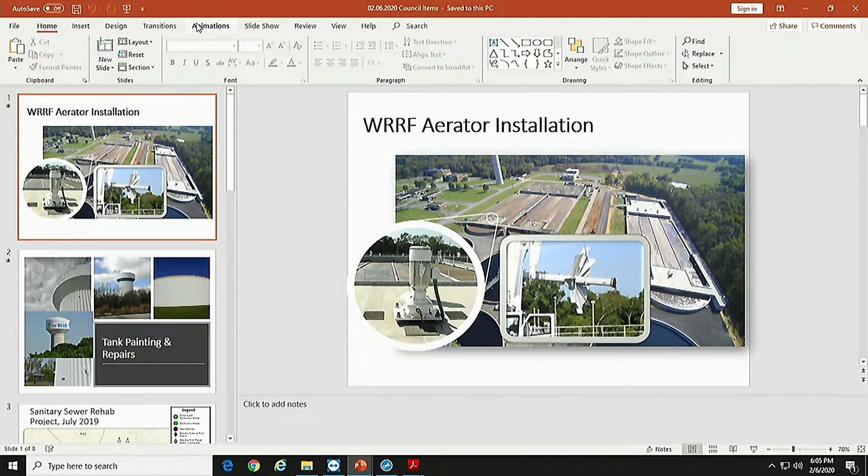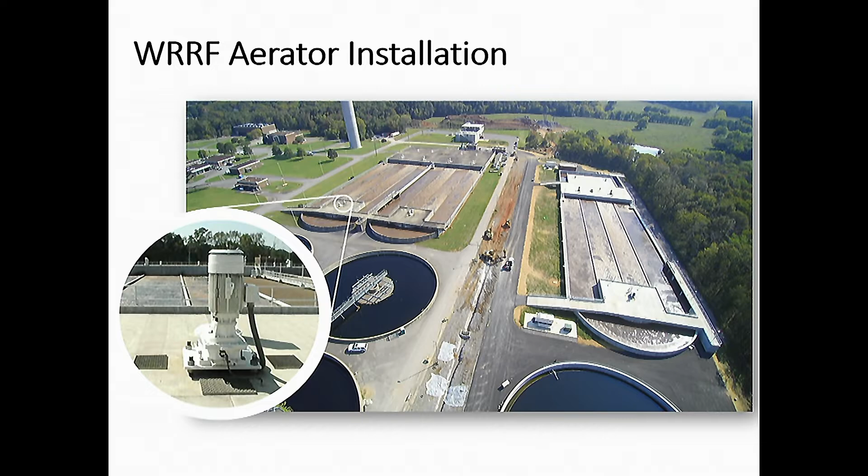All right, we'll move into new business. We have water recovery facility aerators installation, water resources. Mr. Gore: Mayor McFarland, City Council, thank you for the opportunity to come before you tonight. Depending on how much time you all want to spend talking about water resource recovery facility improvements and water plant improvements, I've got some pictures here to make this a little more interesting. What you see on the screen, we have I believe 9 aerators at the Water Resource Recovery Facility. These are actually large impellers.

These impellers entrain air into our microbiological treatment oxidation ditches. We budgeted for 3 of those. We've actually purchased the materials, and using our water, wastewater, mechanical, electrical services contract with John Bouchard and Sons, we are now asking for them to help us install those 3 aerators at the WRF. Their cost to install those is basically $23,349 each, so the total install would be about $70,047. We do have standing hourly unit prices and equipment unit prices that we establish these work orders with them. I'm available for any questions on that item if you have them.

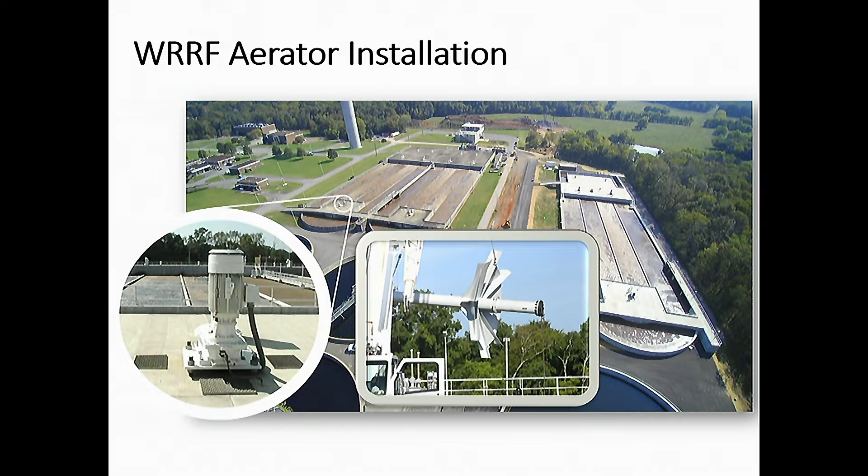Any questions for Mr. Gore? Move for approval. Second. Motion is seconded. Ms. Wright, please call the roll. Vice Mayor Scales Harris, aye. Mr. LaLance, aye. Mr. Martin, aye. Mr. Shacklett, aye. Mr. Smotherman, aye. Mr. Wade, aye. Mayor McFarland, aye. We'll now move into Murfreesboro Water Resources water tank painting and repairs.

There's a couple of pictures here of the Mill Street tank and the Halls Hill tank. I don't have the Tiger Hill tank pictured here, but we effectively have 3. The Tiger Hill tank and the Halls Hill tank are ground storage reservoirs, that's the upper right picture. It's really just a large concrete reservoir on a hill, so it doesn't need to be elevated. The Mill Street tank you see across the street from City Hall has the logo Murfreesboro, home of MTSU. One of those pictures in the top center was from 2005.

I had forgotten this, but it had a blue apron on the tower section, and blue was on top. We repainted that tank back in '05, and it is now entirely white. That tank does have some traces of lead in it, so it will have to be sandblasted down to bare metal. That's part of the reason this overall project is about 2.6 million. It has been budgeted; we have it in our working capital reserve, so it will be paid for through cash on hand.

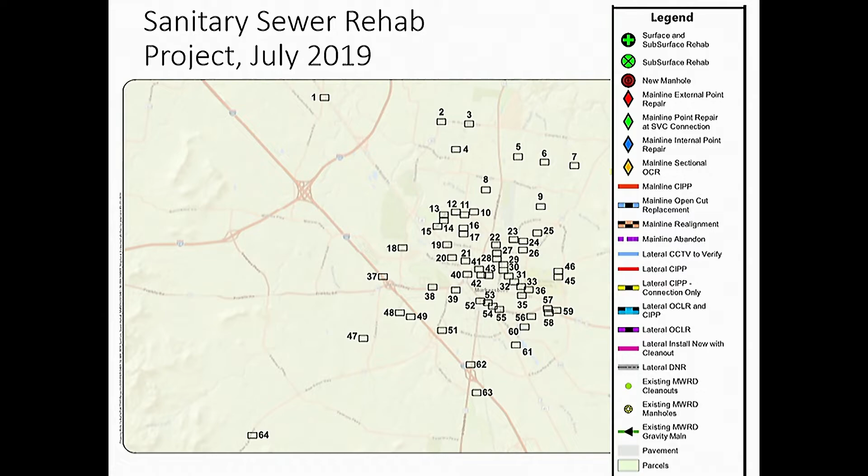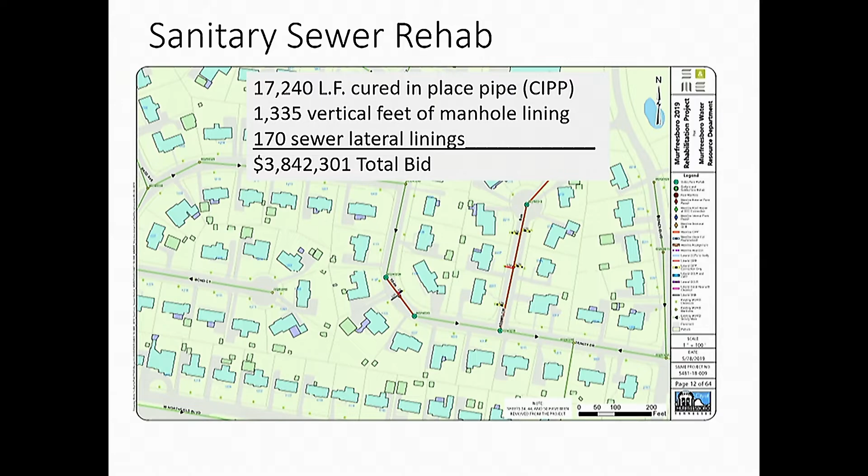So as a reminder, we awarded this project in July of 2019. It was a $3.8 million project with just over 17,000 feet of cured-in-place pipe, 1,335 vertical feet of manhole lining, and 170 sewer lateral linings. The change order we're asking for today is an additional $150,000, bringing total construction expenditures up to about $3.99 million, just under $4 million.

We had $4.5 million budgeted. When you take away engineering expense, we still have about $75,000 remaining in our budget. The additional work does involve some sewer main replacement at West Clark and Northwest Broad, and some exploratory digging and paving repairs involved with sewer lateral work that was unexpected. So we would ask for council approval of the change order in an amount of $150,812, and I'm available for questions.

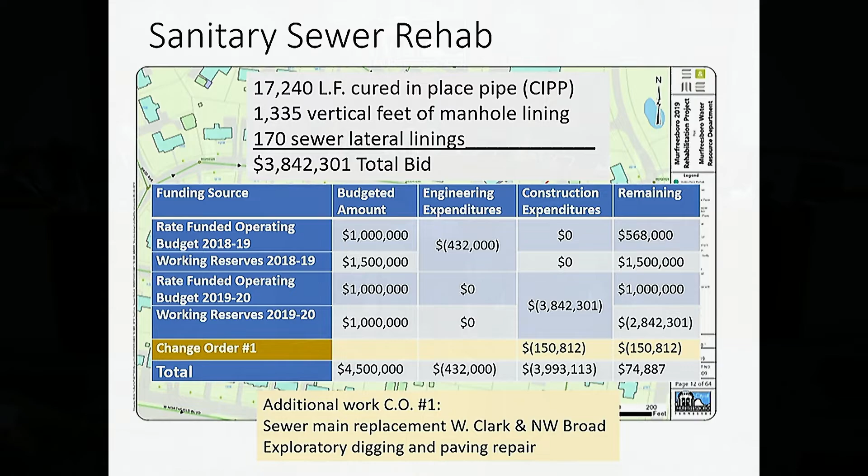So moved. Second. Motion is seconded. Vice Mayor Scales Harris, aye. Mr. LaLance, aye. Mr. Martin, aye. Mr. Shacklett, aye. Mr. Smotherman, aye. Mr. Wade, aye. Mayor McFarland, aye.

Yes, ma'am, speaking of water. Yes, ma'am, how are we doing with the flooding last night and the situation? Are we looking good in Murfreesboro?

There was a lot of email correspondence going back and forth, and we had some high water signage and road closures. Raymond Hillis in the Streets Department was primarily involved with ensuring public welfare on those streets. I put a little memo out on the sewer side of things that said we did have some challenges. We were at 64 million gallons a day at our plant, which is rated for 24, so we were really pumping some water through there.

But the great news is that everybody still has safe drinking water. No one, as far as I know, was hurt. The public welfare was safeguarded, and everyone was able to take a shower and use their facilities this morning. So I'm going to say that we weathered the storm very successfully.

Will you pass along to your staff, the men and the women, that the council wants to thank them for a job well done? Thank you very much. I know a lot of folks don't see it, but folks are getting up real early, and they're out on call in the middle of the night in very wet and dangerous conditions. My prayer is that everybody's just safe, as the city workers are out there trying to make sure what roads are passable, and again, sometimes when you try to safeguard the public, I don't want them putting themselves at risk.

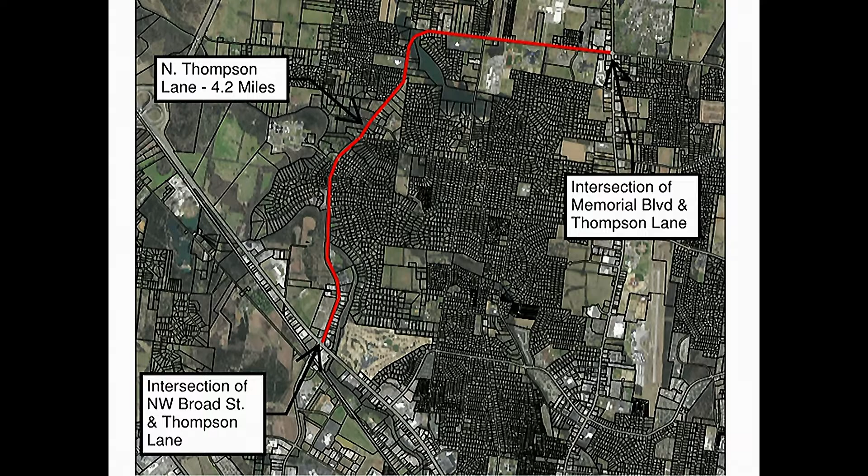Move for approval. Second. Motion is second. Ms. Wright, please call the roll. Vice Mayor Scales Harris. Aye. Mr. LaLance. Mr. Martin. Aye. Mr. Shacklett. Mr. Smotherman. Aye. Mr. Wade. Aye. Mayor McFarland. Aye.

Mayor, talking about Thompson Lane, and I talked to Darren prior to the meeting about this. I spoke with Representative Sparks before the meeting tonight about Thompson Lane and funding for the project itself. And of course, TDOT has a limited amount of funds, I know, but I still think that the sooner we can get Thompson Lane redone, the better off we'll all be, and at least widened. And so hopefully we can expedite that.

He said one way that we might expedite it would be if we were to send a letter signed by all the council members to the local delegation so that they would all be reminded of the importance of us getting Thompson Lane's bottleneck removed, and perhaps get it expedited with TDOT even. So if we can do that, that would be great.

So just something to think about, and if you guys want to participate, we may be able to go ahead and get Thompson Lane moving quicker than what their current schedule says, because I know some of them have good relationships with the governor, and perhaps there's potential of getting a little pressure on the governor to understand, with our growing community, the importance of making sure our infrastructure continues to work properly and efficiently as we possibly can with the traffic concerns we have.

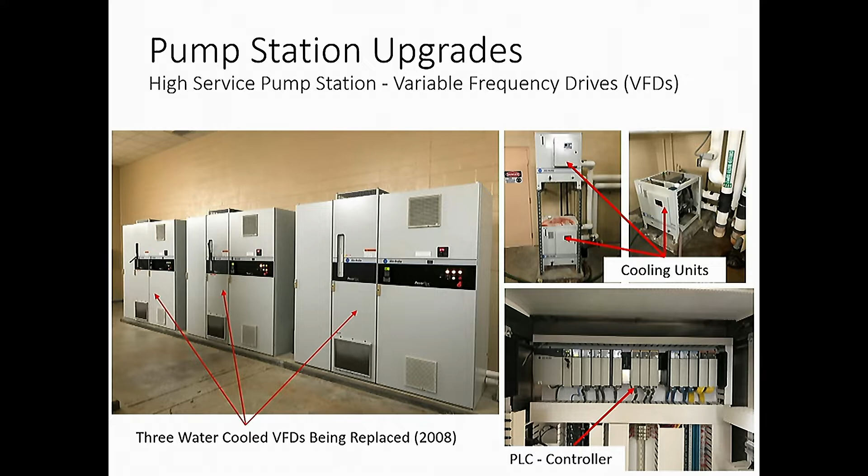asking for an engineering task order in the amount of $140,130 with Smith, Seckman, and Reed. What this task order entails: we have some capital improvements or expenditures at our water plant where some variable frequency drives have reached the end of their useful life. We actually had one need an emergency repair because the cooling piping in it burst unexpectedly, so we only have 2 operating right now. So this engineering task order would entail designing for new variable frequency drives which operate our high service pumps.

We have 3 high service pumps now. We would also include in this task order the design for putting in a 4th pump. We have that, you can see on the right side of your screen. We have the blind flanges in place for the piping to install that 4th pump, so it would really just be the cost of the pump.

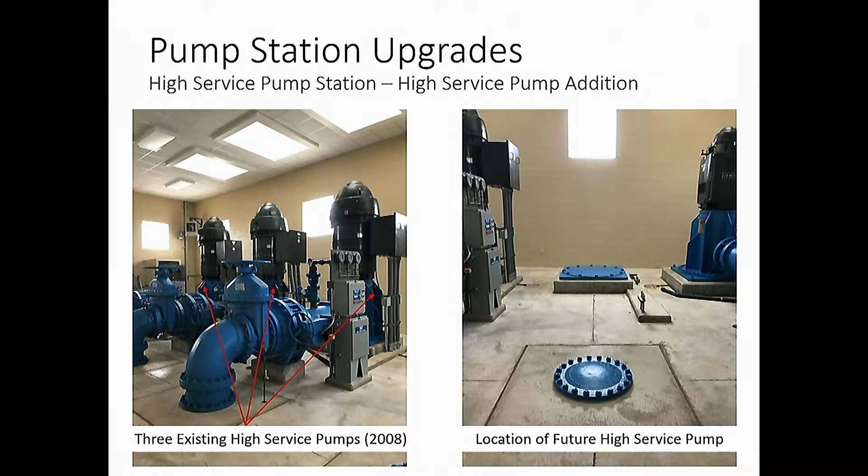There are also 4 variable frequency drives that operate our membrane pumps. The membrane pumps take the settled water out of the settling basin and pressurize it through our, for lack of a better term, spaghetti strand membranes. If you've been out to the plant and seen those membranes, it takes a lot of pressure to get the water through there, but they're great filters - they take out all the Giardia lamblia and the Cryptosporidium and a lot of potential viruses as well. So the total cost for all those improvements is about $2.56 million.

So whenever I bring you a task order for engineering, I also like to bring an estimate of what that ultimate total cost looks like. But for now, we're just asking for the expenditure of the engineering task order with Smith, Seckman, and Reed in the amount of $140,130. I'm available for questions.

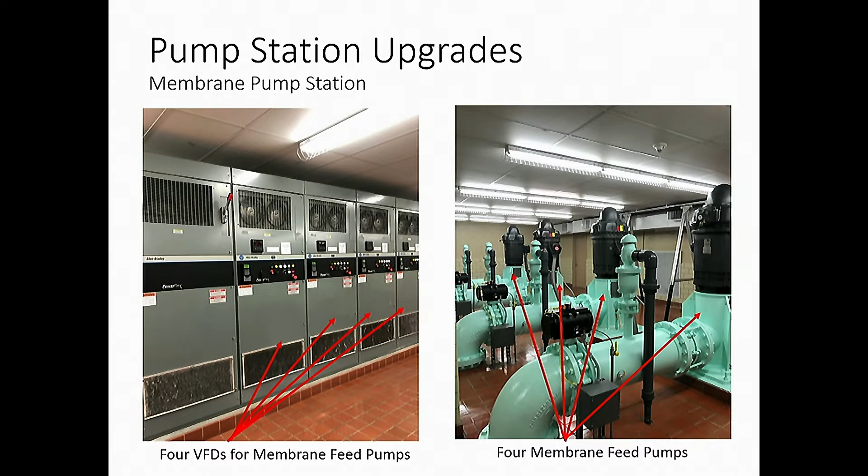Any questions for Mr. Gore? No comments, I move for approval. Second. Motion is seconded. Ms. Wright, please call the roll. Vice Mayor Scales Harris, aye. Mr. LaLance, aye. Mr. Martin, aye. Mr. Shacklett, aye. Mr. Smotherman, aye. Mr. Wade, aye. Mayor McFarland, aye.

All right, thank you, Mr. Gore. We're going to move, before we have our public hearings, to licensing. We have one beer permit tonight before you, Mayor.

This is for a change in ownership at a market at 1660 Middle Tennessee Boulevard. The application is in order for their background check. They do need to finish up their building code inspections before we could issue that permit, and that would happen after we get that back, if you approve it tonight. I believe there is also an application coming for them to include wine in this market - it is currently there under the other owners, but that part is not ready yet. I'll be glad to answer any questions.

So moved. Second. Motion and a second. Ms. Wright, please call the roll. Vice Mayor Scales Harris, aye. Mr. LaLance, aye. Mr. Martin, aye. Mr. Shacklett, aye. Mr. Smotherman, aye. Mr. Wade, aye. Mayor McFarland, aye. I don't see any board and commission appointments.

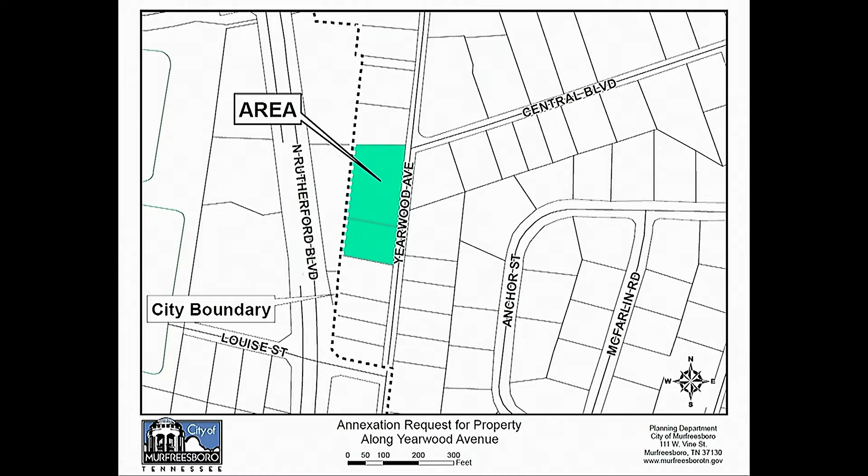We'll go into more detail about the proposed development during the zoning public hearing. Now we need to conduct a public hearing regarding the annexation petition and the plan of services only. The zoning will be the subject of the public hearing that occurs after that. Planning Commission conducted a public hearing on this matter on December the 4th and voted to recommend its approval to the City Council. I'll be happy to answer any questions before or after the public hearing.

Any questions on the plan of services and the annexation? All right, seeing none, we'll need to hold a public hearing. Anyone wishing to speak, if you'll come to the podium, if you're representing a group, or if you're coming to speak, you'll have 5 minutes. Anyone wishing to speak, if you'll ask your questions to the council, we'll get those answered at the end of the public hearing. Anyone wishing to speak for this plan of services and annexation, please come to the podium.

Good evening. My name is Richard Graham. I live at 2403 Central Boulevard, exactly the northeast corner of Central and Yearwood Avenue. I can see all the way down the north boundary line of that property.

I think, if I'm not mistaken, y'all approved a fence of some sort down Yearwood Avenue, a solid fence. I would like for you to consider putting a fence on the north side and a fence on the south side. Now, I think originally y'all decided to put trees, greenery, or whatever. I don't think that's a good enough containment for the neighborhood.

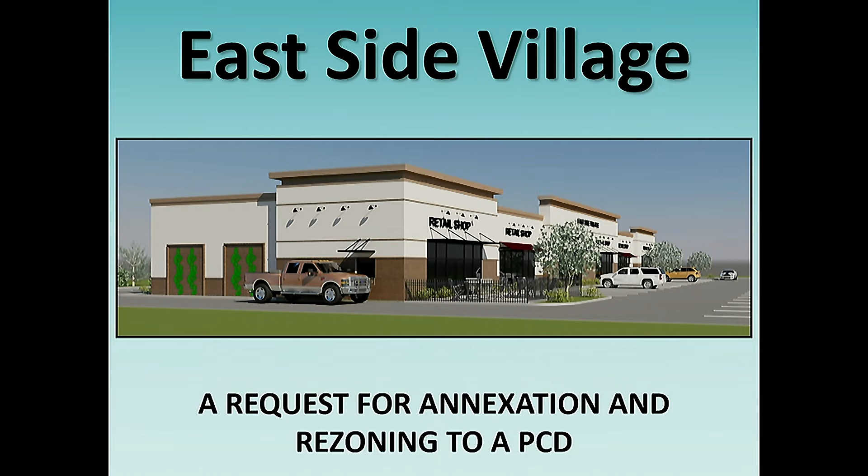You can see the site is located just on the east side of North Rutherford Boulevard, just southeast of the MTSU campus. Zoom in closer and you can see the site itself. As Matthew talked about, there's a retail center and a gas station across the street on the other side of North Rutherford Boulevard. Yearwood Avenue is the yellow line running along our eastern boundary, where the residential units are on the other side, and to the south and north as well.

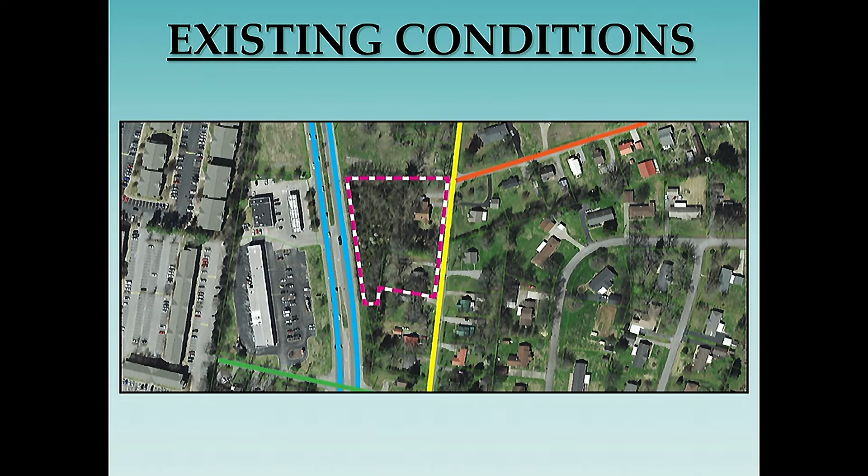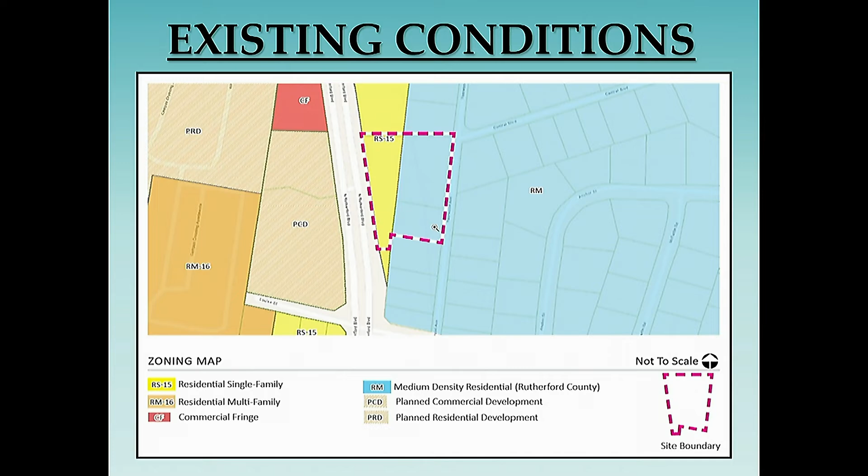As Matthew talked about, we have dual zoning on this property, so we're looking at combining that down to make the PCD. We're taking the residential, both in the city and county, and pulling that into our planned commercial development.

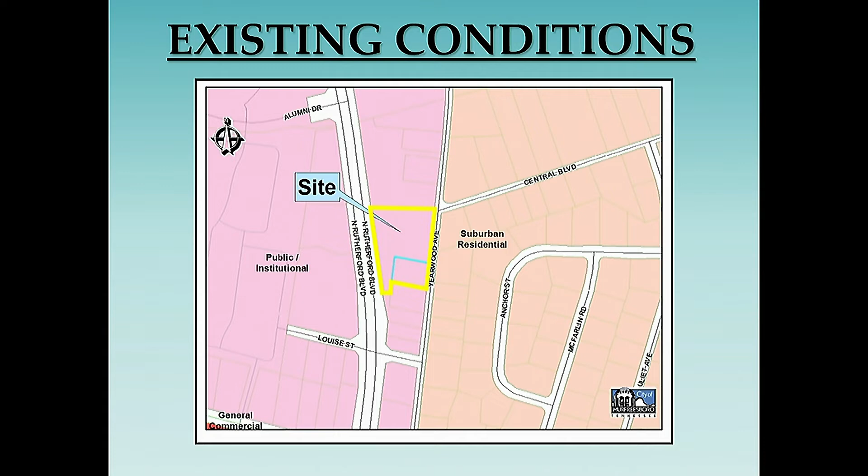Regarding land use, this property is currently set up as public and institutional, mainly based on its proximity to the MTSU campus. Properties across the street, which are retail in nature, are the same as what we're proposing tonight. They're actually included in that public institutional use, so we feel it's a comparable use. We see this development as an enhancement that can help campus by providing services for students, teachers, faculty and staff in their daily needs, through the services we'd potentially have for clients inside the building.

Looking at the plan itself, we're proposing a 1-story single building about 11,100 square feet. This will be a multi-tenant retail strip center. On the northern side of the building we're providing drive-through access, so we're looking potentially at a restaurant, a dry cleaner, or some kind of bank tenant on that northern side. The rest of the building would be leased to other tenants.

Matthew talked about our work with the Water and Sewer Department. We were advised this is a low sewer capacity area, so we're looking at low flow users as our tenants in this space. We'll definitely be working with the Water and Sewer Department to make certain any tenant use is appropriate for our sewer flow from the property. On the back side, we have 10 queuing spaces for our potential drive-through.

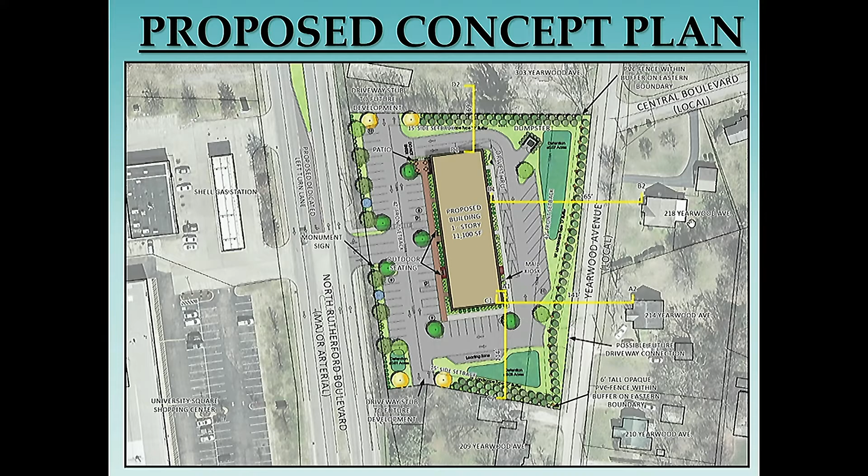Kind of give a little perspective - you can see that fence in these cross sections we provided this time, showing you the building itself is on the left-hand side, coming in the lower right corner of the building. This gives you a perspective about how the separation is between the building and the uses, but also shows where we're proposing that 6 foot tall fence and those evergreen trees on the outside along the Yearwood Avenue side.

Just a couple different views - this is another view along Yearwood showing the greater separation, because this building and property does tilt further away from Yearwood based on aligning this building with North Rutherford. So you get a little greater separation as you move more towards the north end. This gives you a better feeling, but again shows that 6 foot tall fence and buffer along Yearwood. And this gives perspective looking off at the southern end of the property in regards to separation.

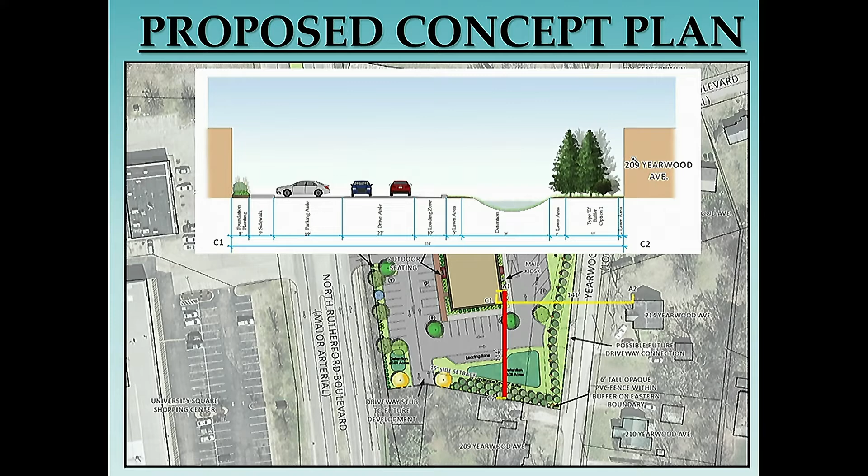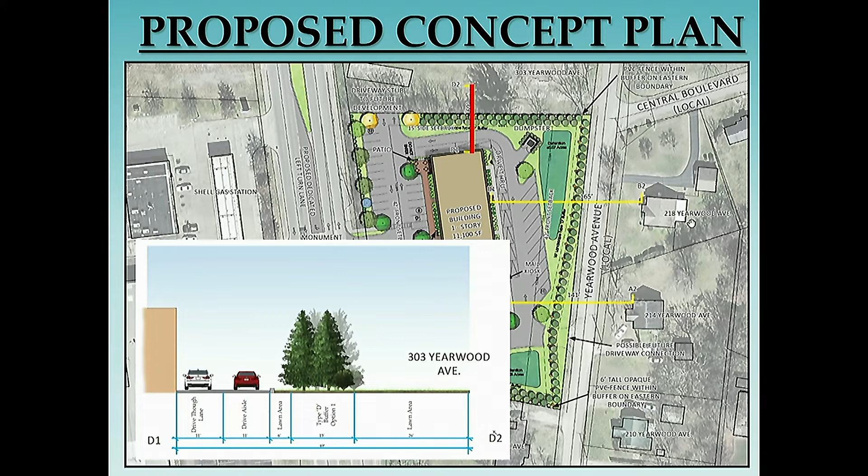This is where you see the double row of evergreen trees, which is in the beginning process. You also have a 4 foot tall evergreen shrub laced in between the gap in the staggering, to fill in the gap in the short term as those trees mature. So that's the view on the south side. This shows you what the view looks like on the north side. The Yearwood Avenue property to the north has no structure on it at this time - it's a vacant property, so no structure is shown on this diagram, but it shows we are providing that type D double staggered row of trees on that side as well.

Architecturally, we'll be looking at a couple different brick components. This will be an all masonry structure with a darker type of brick on the lower portion and a lighter tan brick on the top. We're looking at doing some accent elements along the cornice side of things, really playing into some good architectural character of the building on that side.

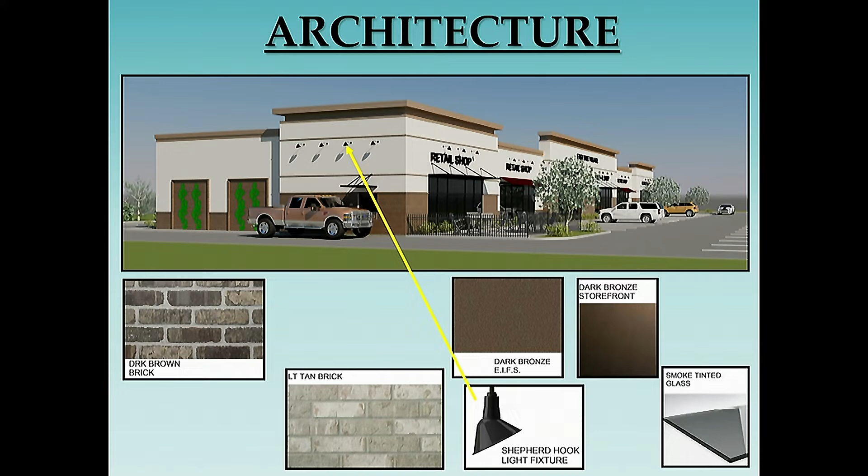And then keeping along with that darker tint, we'll be doing some darker bronze metallic pieces along the windows, some smoked glass, and also incorporating some shepherd hook lighting fixtures along the building to add a little extra lighting, but also add some more architectural character to the building itself.

This is just all four elevations. The west elevation on the top of this drawing is the one that actually faces Rutherford Boulevard, so this is what they will see from Rutherford. The middle drawing there is the back of this, facing Yearwood Avenue. Aside from the fact that we'll have a fence and evergreen trees growing up over time, this is what you would see if you were looking at the back of the building on that side.

HVAC units and such will be on the roof, and it'll be hidden behind the parapet wall that you see there in regards to the cornice elements on the back side of the building as well, not just on the front. We'll be putting these on the back, and then the side angles on those.

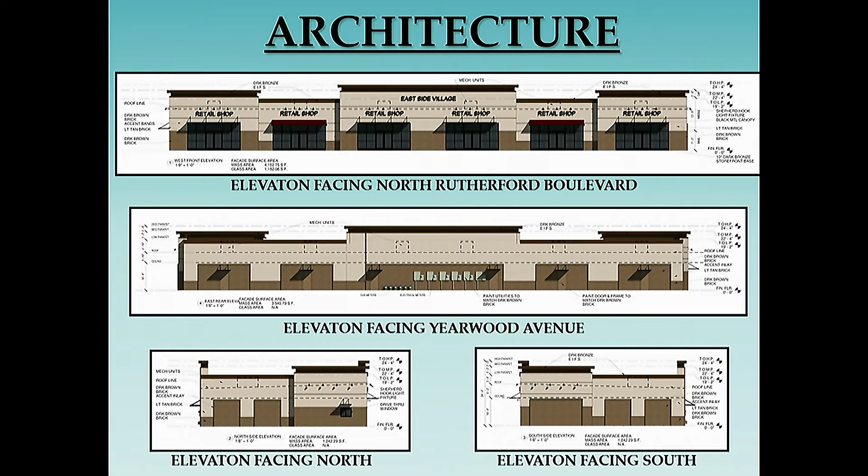Access, like I talked about, we do have one main access point. We're proposing an access point at the already existing 3-way intersection on North Rutherford. Right now it is a 3-way; we're proposing to make this the 4th leg. We'll have a dedicated lane in, and two dedicated lanes out—one to turn right on Rutherford to head north, and one dedicated lane to turn left. So it'll be a 3-lane access point at this point in time.

We'll also be cutting the median itself to install a dedicated left-hand turn lane, so that as you're coming south on North Rutherford, there's a dedicated left-hand turn lane to cross the traffic heading north to get into the site. So we're pretty much providing a very well-functioning 4-way intersection.

And again, as I talked about earlier, there is that opportunity in the future that there could be a connection based on whatever jurisdiction, so we have that stubbed out for that opportunity.

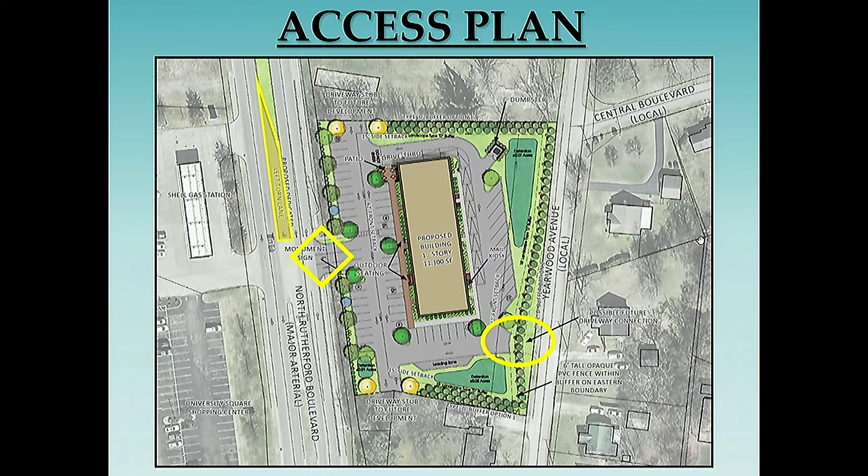A couple of the pieces, parts—we are looking at providing a couple little amenity areas. We're looking out in front of the drive-through portion with the potential for an outdoor dining area, say if that was a restaurant on that north side, being a dining area. If not, that would just be more of a space for outdoor gathering on that side. And again, looking at a couple other places with outdoor seating areas along the building itself, with a decorative type of pavement along the front of the building, whether that be brick or stamped concrete or some other material to add a little extra character to the building on that side.

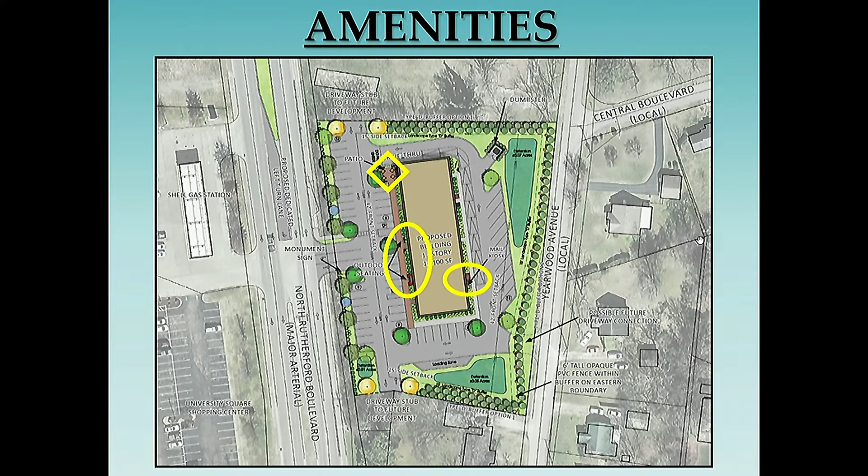So on the back side, we'll of course have a wonderful mail kiosk back there as well. I appreciate your time and consideration of this project, and I'm here for any questions now or at the public hearing.

Mr. Graham had a question about the fence—whether it's placed on the eastern side. Yearwood is the eastern property line, and we provided a fence along the east side. He was asking about a fence on the northern side, where we're providing the full type D landscape buffer along the north side, which includes a double staggered row with evergreen shrubs as well.

Rob, I brought this up during the planning commission meeting, but I know the planning commission doesn't love black chain link fence. I talked to you guys after the meeting, and y'all kind of agreed it would be okay to put that fence between this row of trees, which would not be visible, but it would give the security the neighborhood was asking for, on both the north side and the south side. It's a double row of trees, and if they put that black chain link fence between the rows, you don't see it, but it gives security from two directions.

With the drive-through across the back of the building, this keeps people from coming around toward Yearwood who might want to take advantage of somebody parked on the back side of the building. So it kind of secures the lot.

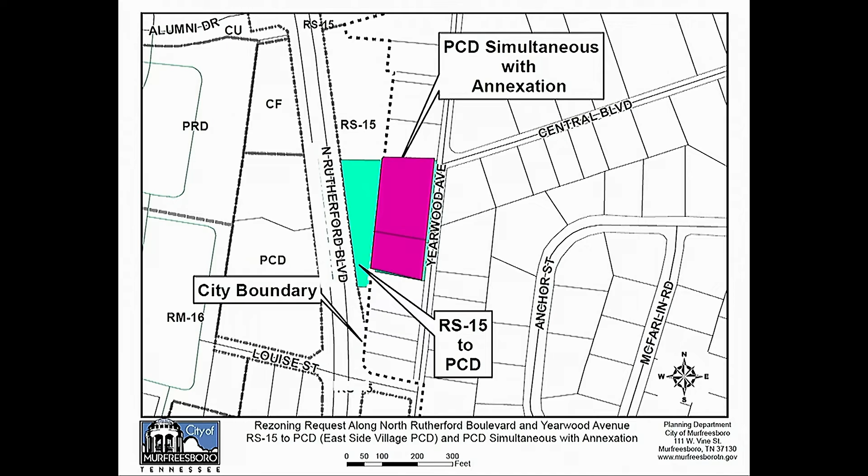But I think as long as this project is, we're dealing with the conditions as they're presented today, and that's why I would support what Rick's saying, and I think Rick is supporting what I'm saying, under the current conditions would be the best layout. With time, as the property develops, then it should be evaluated as to whether or not it should be removed.

But I don't want it to be a permanent fence. We don't want to create boxes going down the street with each development. But at the same time, that's not what we have right now. We have residential property on both sides of it, RS-15 to the north, and the property to the south is still residential property that we think is going to develop hopefully soon.

I'm concerned about the south when putting it there, because I don't think it's going to be there that long, but there's no guarantee what happens with the economy or whether the person who currently owns the property may decide to sell it and have somebody else develop it, and they may sit on it for 15 years. So understanding we're dealing with the current conditions as the property sits today, I think the best plan is chain link fence between the north and south boundaries and solid fence across the back to block lights from penetrating the vegetation to the neighborhood.

And for clarification, if you look at the concept plan, they have the buffer stopping here and here, right before you get to the stubs to the north and south property line. Is that the limits of where you would like the fence to go? That's where the fence stops as well.

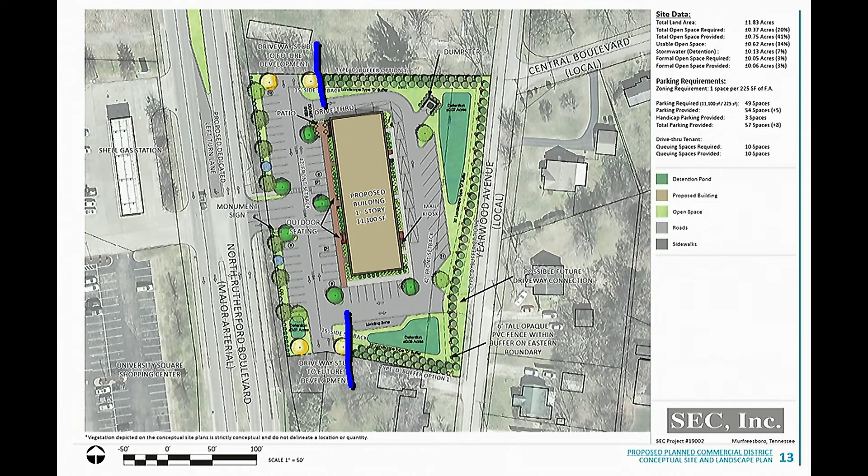So we have a motion on the floor to continue with the fence on the east side. We would have a chain link fence, black, hidden between the two buffers on the north and south side, but subject to removal if additional property comes into the planned development in the future. The fence would be 6 feet in height, and the buffer plantings would be subject to removal as well upon development. So I'll second what Rick's motion was and what Shane just translated, so we have a motion and a second.

Vice Mayor Scales Harris: Aye. Mr. LaLance: Aye. Mr. Martin: No. Mr. Shacklett: Aye. Mr. Smotherman: Aye. Mr. Wade: Aye. Mayor McFarland: Aye.

Folks, I hate to do this, but I have my kid's last basketball game of the year, so I'm going to sneak out and try not to get a speeding ticket for a game that started at 7:30. Good luck. So Vice Mayor Scales Harris is going to take over.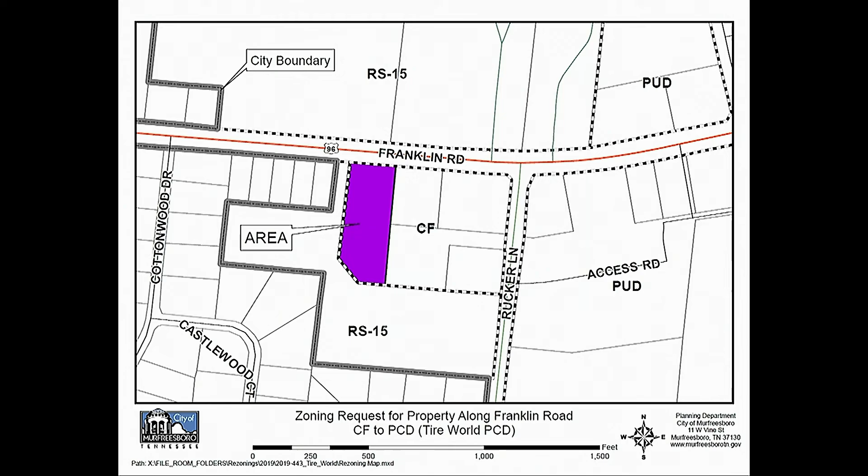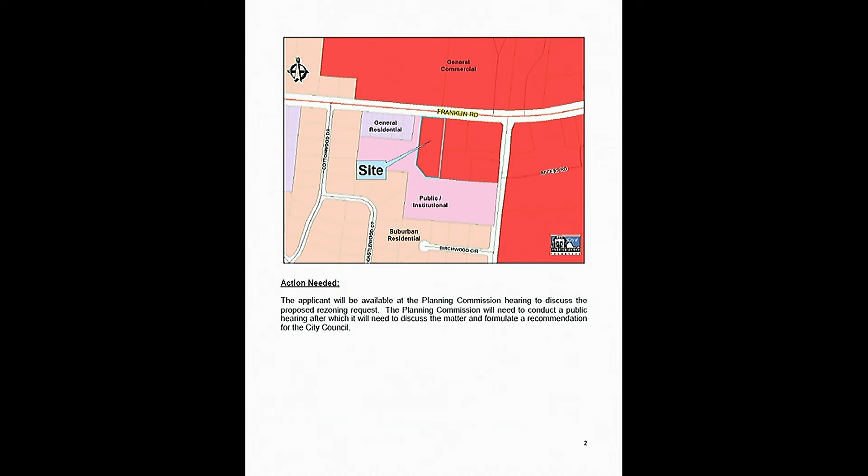The comprehensive plan calls for general commercial land use character for this property, and this particular use is consistent with that character, so this is consistent with the comprehensive plan. As I mentioned, the Planning Commission recommended approval of this request after holding a public hearing on December 4th. And unless you have any questions for me, I'll yield the floor to Mr. Taylor to make a brief presentation.

Hey, I just want to make a couple comments real quick. You come on up, but Matthew, I just want to tell you thank you for all the work you're putting in, man. This stuff is all hard these days, but I appreciate all the work you and your department are doing right now. The best way I know to explain it is that I'm going to abstain from the discussion on this, which will probably make your night. But I do need to abstain from this discussion, okay guys? I just wanted to get that out there. But Matthew, thanks so much, man. Thank you for your kind words.

Thank you, Vice Mayor Harris and members of the council. I'm Matt Taylor of SEC here in town. I am accompanied by Mr. Randy Lopez, who represents Tire World, the applicant on the project. And we do have a brief presentation on our proposed location of a new Tire World.

As Mr. Blomeley said, it's about 2.4 acres on the south side of Highway 96, just to the west of Rucker Lane. Some of the more recent development in the area was Toots West, as well as River Oaks Community Church, both on the same parent tract as this site. The current property is mostly cropland and pasture land, with no active livestock on site.

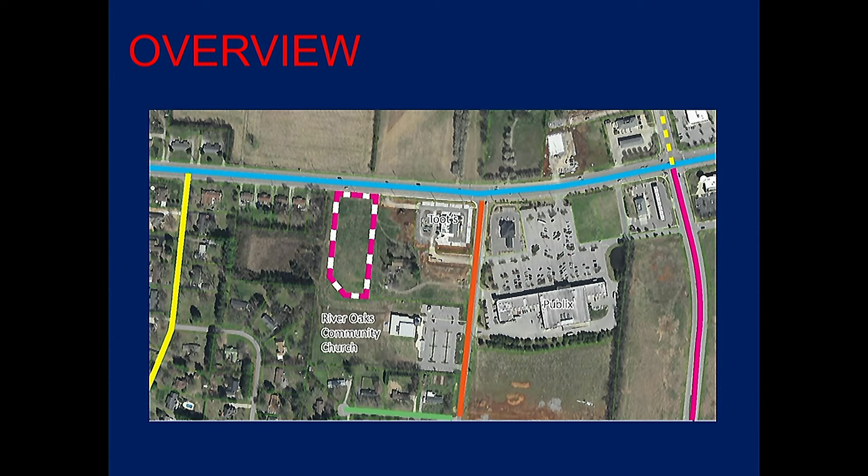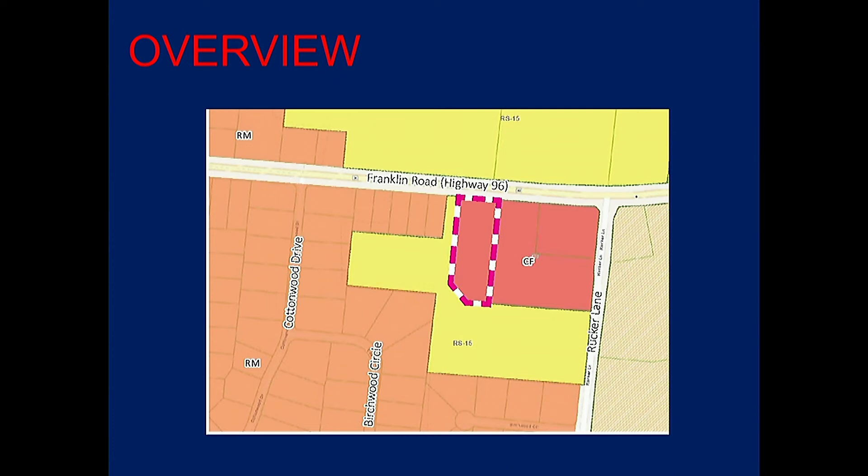As Mr. Blomeley said, the site is zoned commercial fringe. This particular use is not allowed in that zoning district, but we feel it is a very complementary use, not only to the residents in the surrounding area, but to the businesses and their patrons nearby. It is also compliant with the 2035 land use plan.

The campus layout breaks the buildings apart to create a more campus atmosphere and separate the uses. The northerly, larger building at the top is more retail oriented, where customers come in to get tires serviced or new tires. The southern building will be more back-of-house corporate headquarters. Tire World has several locations around Middle Tennessee, not just Murfreesboro, so we're consolidating that back-of-house use in this one location.

Those buildings total about 14,000 square feet in size, both 1 story. We've got over a third of the site dedicated to open space, so it'll still be a very green space even after it's developed. We've tried to provide good pedestrian linkage back out to Highway 96, screening the parking, and providing ample landscaping around the site.

We have one driveway connection, tying into an existing driveway onto Highway 96 that was constructed with the Toots project. We've also planned for 2 future connection points to commercial sites to the east and west of us, so when those develop, we'll be able to tie directly into them instead of having to get out on Highway 96 itself.

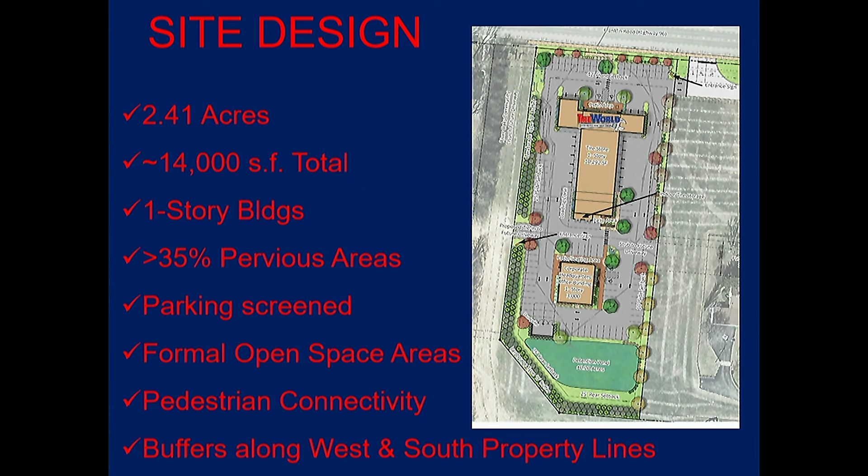For the architecture, we were very careful about maintaining a campus atmosphere while complying with the design guidelines. We've got defined entryways, multiple building planes, and we shortened the maximum building height down to 30 feet, even though CF allows up to 45. So we've been much more restrictive with this project than the CF district allows.

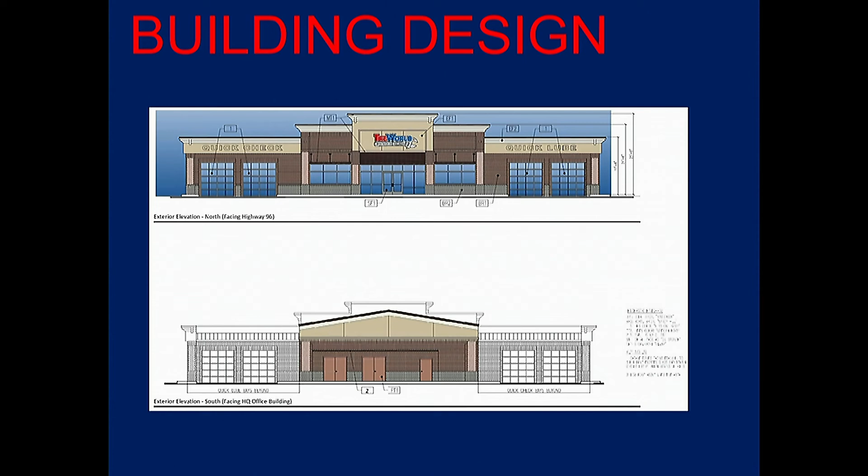The top picture here is what will face Highway 96, a very attractive front of the building. Those doors will be frosted glass on each side of the main entrance, so you can't see into those entryways. You'll notice intricacies in the brickwork, canopies, and we carry that brickwork and glass around the side. The rear office building will contain the same architecture and brick detailing, reinforcing that campus atmosphere.

This just outlays all the materials. They're all good quality materials that we've proposed for the building.

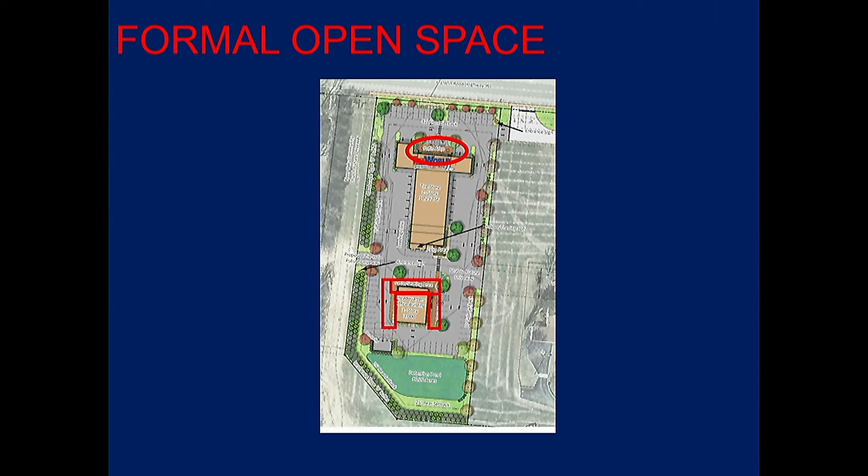We have planned 2 formal open spaces. The one on the northern side is geared more toward customers, while the southern side is for our employees. Some of these will have enhanced paved areas through pavers and colored concrete, and of course seating and shade structures.

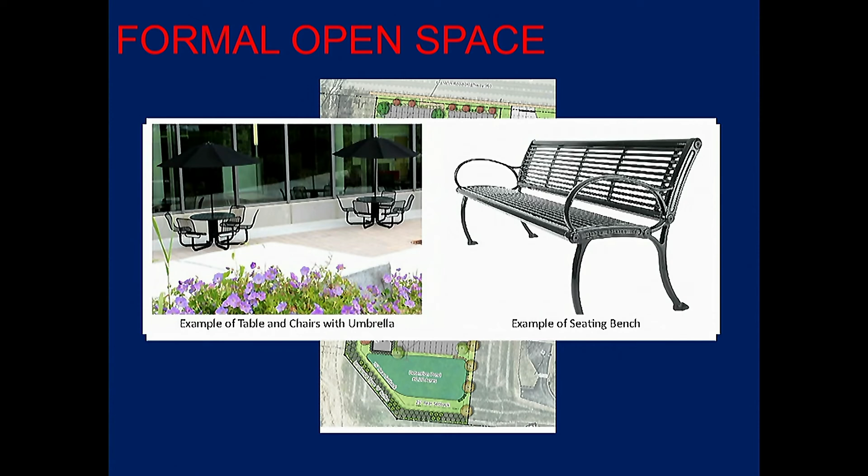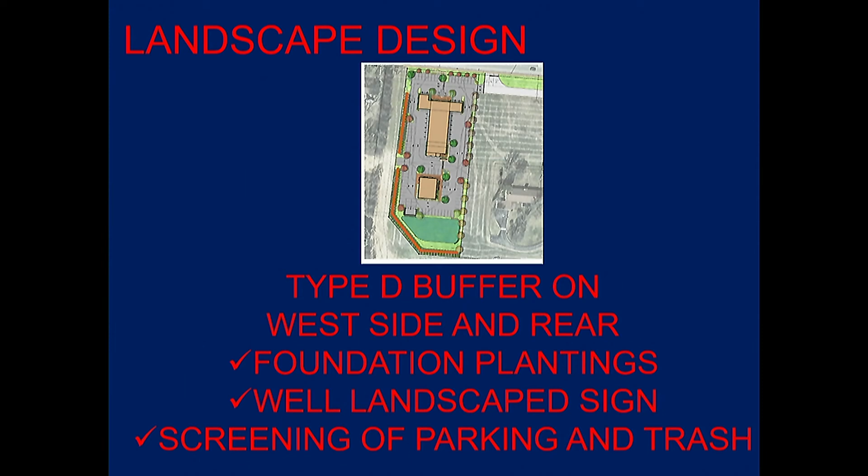For landscaping, we'll have a type D buffer along the west and south where we abut the church's property, and the rest of the property will have normal perimeter landscaping and base of building landscaping, except where the garage doors are to get into the building — some of those are screening efforts.

For the uses, we really narrowed these down so they're very low impact and complementary to the area. We know exactly what we want to do, so the uses we've outlined as allowed all go back to what the use of the building itself is. There's no speculative use associated with this list — it's much more restrictive than the more comprehensive CF uses.

I'll be happy to answer any questions now or after the hearing that you might have. Any questions?

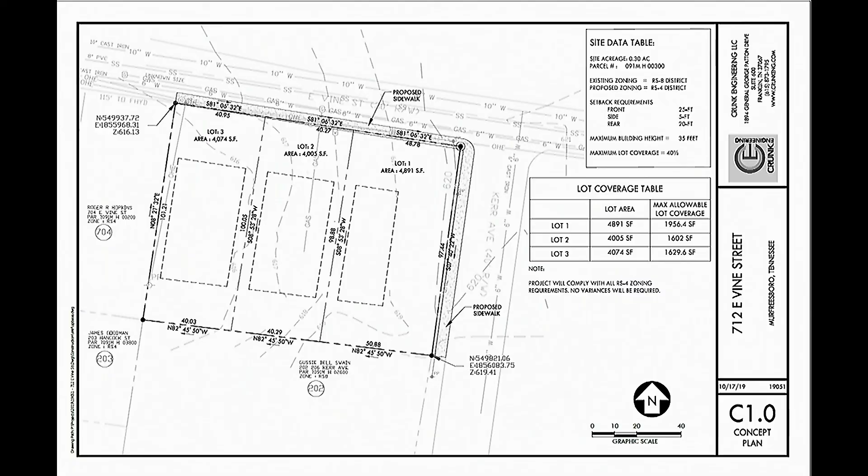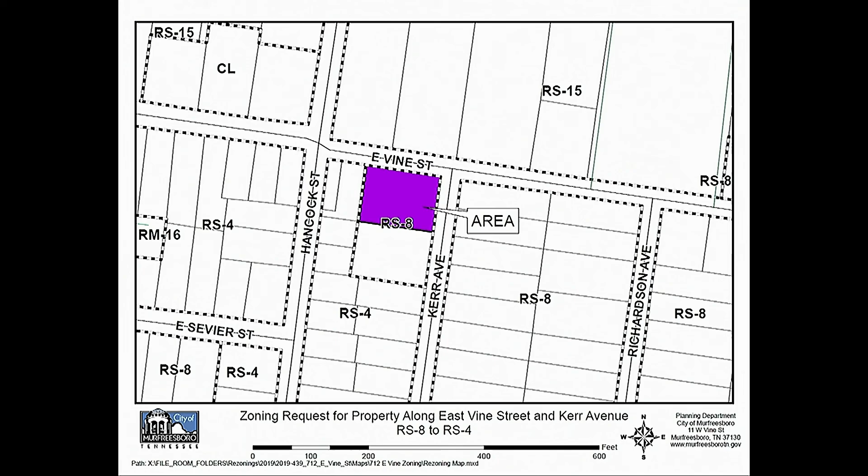The comprehensive plan recommends suburban residential for the property. Suburban residential is more for the periphery of the city, and staff feels that auto-urban residential, which is more consistent with RS4, is probably more appropriate for this area as opposed to suburban residential, which is more in line with the periphery of the city. So City Council will need to determine whether or not this is an appropriate instance to deviate from the comprehensive plan.

While I'm here, I'll give you an update. Staff has been vigorously meeting with Ragan-Smith over the last several weeks. We had our kickoff meeting with Ragan-Smith on January the 9th for our comprehensive plan future land use map update, and we've had probably 5 or 6 meetings since then with them, and also internally with staff in preparation, analyzing all the various things we want them to look at. So that's moving full speed ahead, and we hope to have that completed product to you later this year, and we'll continue to keep you posted on that.

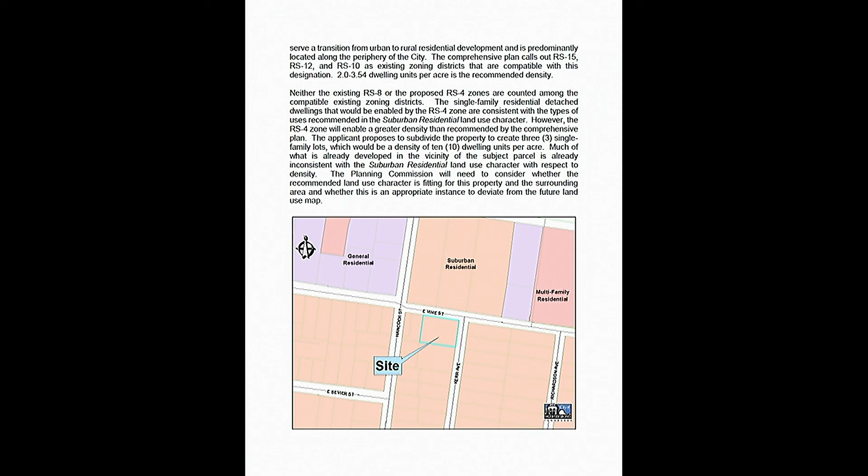With that being said, the Planning Commission did conduct a public hearing on this matter on December 4th and recommended approval of the rezoning request. Mr. Will Crunk is here, the applicant, if you have any questions for him. I'll be happy to answer any questions before or after the public hearing.

Any questions? At this time, we're going to open the public hearing to rezone approximately 0.3 acres along Kerr Avenue and Vine Street. The same rules apply: individual 3 minutes, group 5. Anyone wishing to speak for or against? If not, we'll close the public hearing.

And now we're going to consider the ordinance rezoning approximately 0.3 acres along Vine Street and Kerr Avenue. Move for approval. Second. Mrs. Wright, will you call the roll, please?

Mr. LaLance? Aye. Mr. Martin? Aye. Mr. Shacklett? Aye. Mr. Smotherman? Aye. Mr. Wade? Aye. Vice Mayor Scales Harris? Aye. If there is no further business, we stand adjourned.